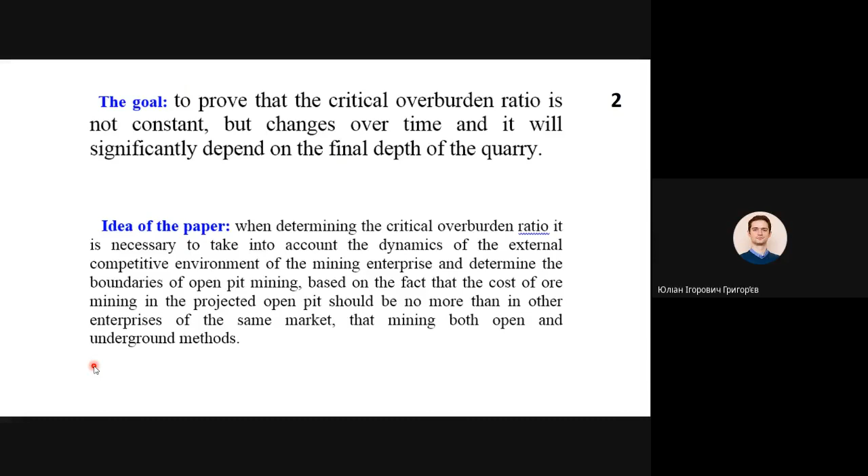Therefore, the goal was set to prove that the critical overburden ratio is not constant but changes over time, and it will significantly depend on the final depth of the quarry. Idea of the paper: when determining the critical overburden ratio, it is necessary to take into account the dynamics of the external competitive environment of the mining enterprise and determine the boundaries of open pit mining based on the fact that the cost of ore mining in the projected open pit should be no more than in other enterprises of the same market that mine both by open and underground methods.

Many calculation principles of determining quarry boundaries are based on the fundamental: the allowable cost of ore mining should be more or equal to the cost of ore mining of the designed open pit. Formula 1. It should be noted that the allowable cost is taken as the cost of ore of one of the basic mining company's competitors with the open pit method of the deposit development. Moreover, the allowable cost of ore is taken as it is at the time of designing a new quarry or reconstruction of one already working. The expected cost of ore for the projected quarry is calculated depending on the value of the overburden ratio by Formula 2.

After substituting the expected cost of mining ore and transformation of inequality 1, Formula 2 takes the form of Formula 3. It's here. The left-hand side of the expression determines the value of the critical overburden ratio, and then taking into account expressions 1, 2, and 3, we obtain inequality 4. Based on the above, the condition of competitiveness of the designed quarry could be summarized as follows. Overburden ratio in a quarry that is designed should be less than or equal to the critical overburden ratio that takes into account the current economic development indicators of the operating enterprise.

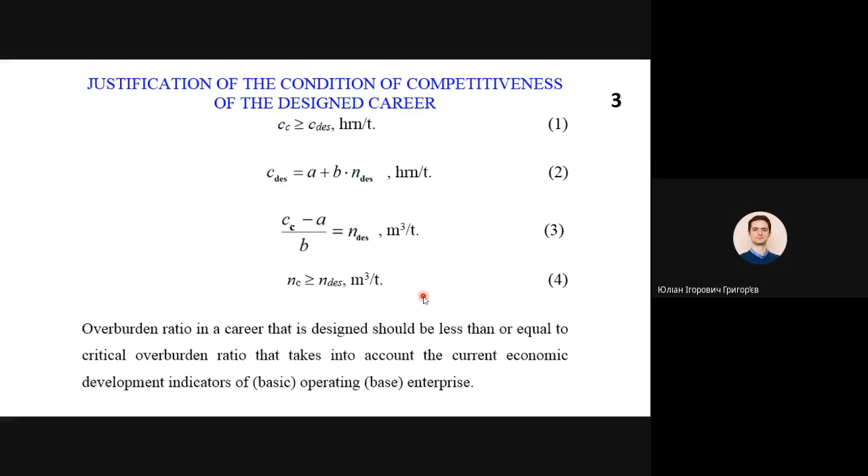It should be noted that in the regulatory documents, the calculated critical overburden ratio to determine the final depth of the open pit is taken as a constant value. However, the basic competitor continues its work and over time will change its economic indicators, in our case, the ore cost. The reason for this is the change in the current overburden ratio to a greater or lesser extent. Let's consider an example of two conditional basic open pit competitors. Possible change of current overburden ratio, sheets 4 and 5.

In the conditional open pit number 2, in contrast to the considered open pit number 1, the boundaries on the surface have not yet approached their final position, and further development of the quarry is carried out with the development of mining both in the horizontal direction, here and here, and in the depth.

In figures 1 and 2, the numbers 0, 30, 60, 90, and 120 indicate the stage of reduction of mining operation in conventional base quarry competitors every 30 meters. Mining condition of working wall at stage 0 characterizes the current state of mining in the open pit and serves as a starting point for further research into their development.

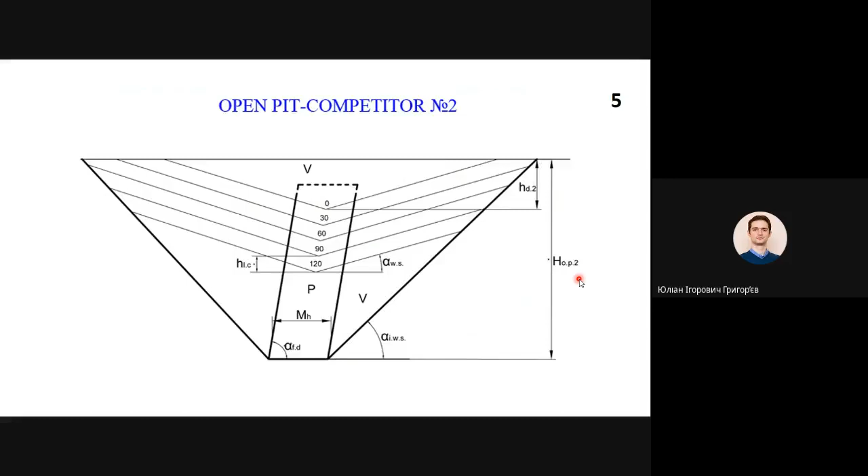To determine the final depth of the future conditional projected quarry, we selected a characteristic section of the field. As in the conditional base competitors number 1 and number 2, and for the conditional quarry that is projected, from the position of the working walls at the 0 stage, we build their future position at the stage of mining development every 30 meters in depth.

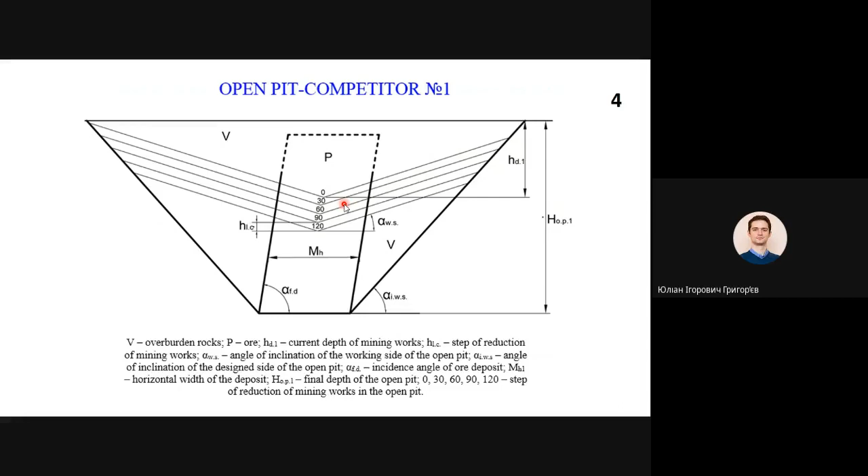At each stage, we determine the volumes of overburden and ore, and we show these results in a calculation table on sheet 6.

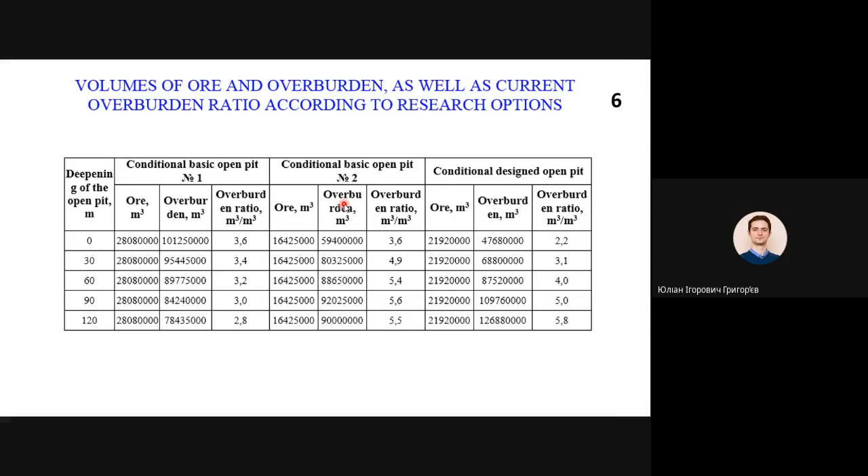For the projected open pit and basic operating pits, we build the schedule of change of current overburden ratio at stages of decrease in mining operations of basic and designed quarries. This schedule is here. Also on the graph we show the line of the calculated critical overburden ratio, line 1.

Based on the accepted mining and geological conditions of development of conditional deposits, the current overburden ratio in the future operation of conditional base pit number 1 will decrease. In the future operation of conditional base open pit number 2, the current overburden ratio will increase until the design boundaries of the quarry on the surface are reached, and then gradually decrease.

Here is the extremum. This change in the current overburden ratio is shown on this sheet by lines 2 and 3, here and here.

In these cases, the current overburden ratio of conventional base pit number 1 and number 2 are critical overburden ratio for the conventional pit that is projected. If we calculate the critical overburden ratio for the newly designed pit without taking into account the time-varying current overburden ratio of the base pits number 1 and number 2, as accepted for the present research, it will be constant, like line number 1.

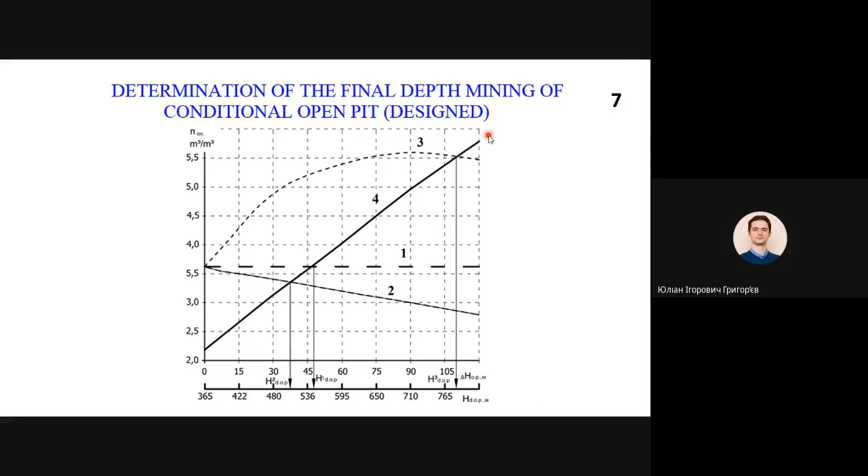The graphical solution for determining the final depths of the conditional pit which is projected is presented on sheet number 7.

Sheets 7 and 8 show that the deviation of the final depth of the conditional projected pit, determined by comparing its current overburden ratio with the current overburden ratio of conditional base pit competitors, from the final depth determined by constant critical overburden ratio, can be from 14 to 45%. It follows from the above that to determine the boundaries of the projected pit, the critical overburden ratio must be determined taking into account the possible change in the volume of extraction of overburden and/or mining at basic competitors, that is, taking into account changes in their current overburden ratio.

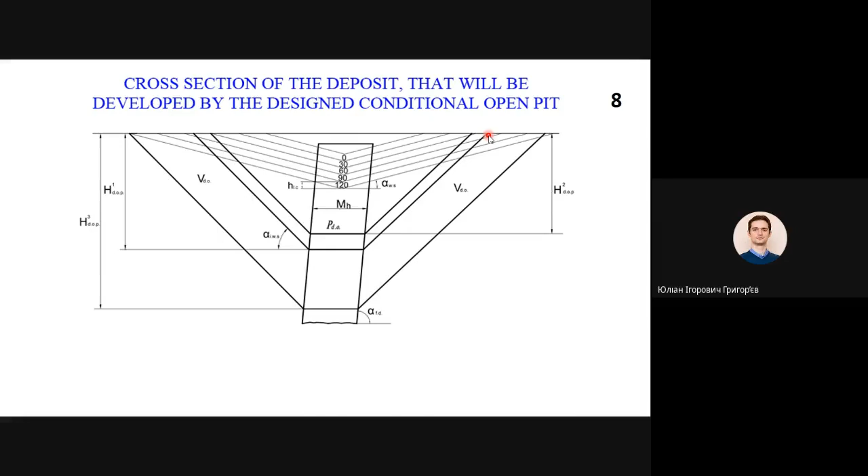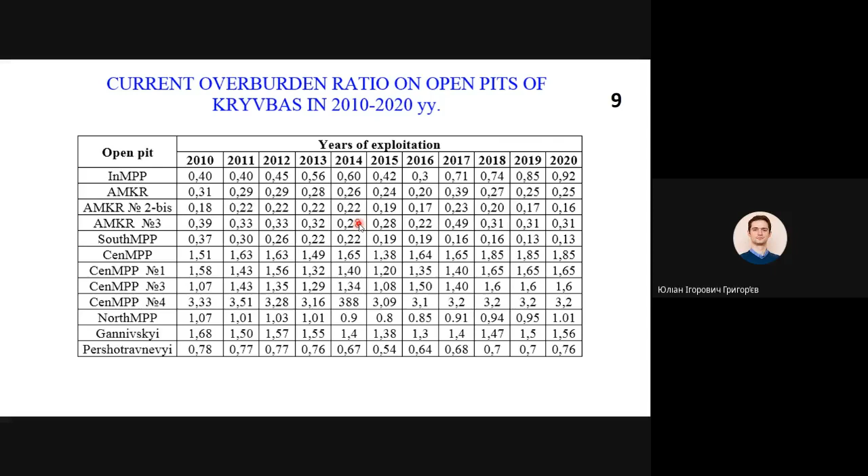So, conclusions. A new method for determining the final open pit boundaries has been developed, which differs from the known ones by taking into account the change in the critical overburden ratio over time, as well as determining the impact of technological indicators of competing enterprises on the final depth of the projected pit.

It is proved that the deviation of the final depth of the projected conditional pit, determined on the basis of comparing its current overburden ratio with the current overburden ratio of conditional base pit competitors, from the final depth determined by constant critical overburden ratio, can be from 14 to 45%.